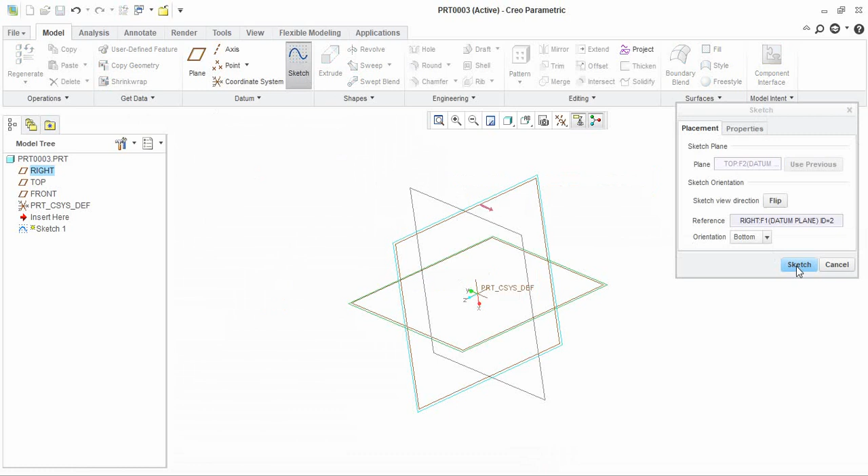So create a swept blend. At first you need a basic sketch, and based upon the sketch we will create the sweep blend. Here I am going to use a spline.

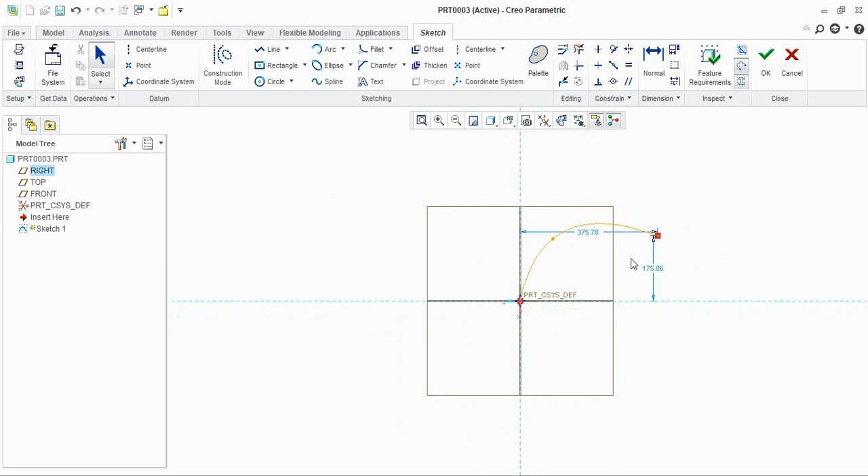Use your mouse center scroll button, double click to exit the sketch. We can use dimensions if needed, whatever dimensions you need. We will change it as 200. Here we will use 400.

So we have created a basic spline. If you need to add any additional sketch, you can add it in the sketch. I am going to use a line. We make a line and make it tangent to this spline. For that we will use constraints.

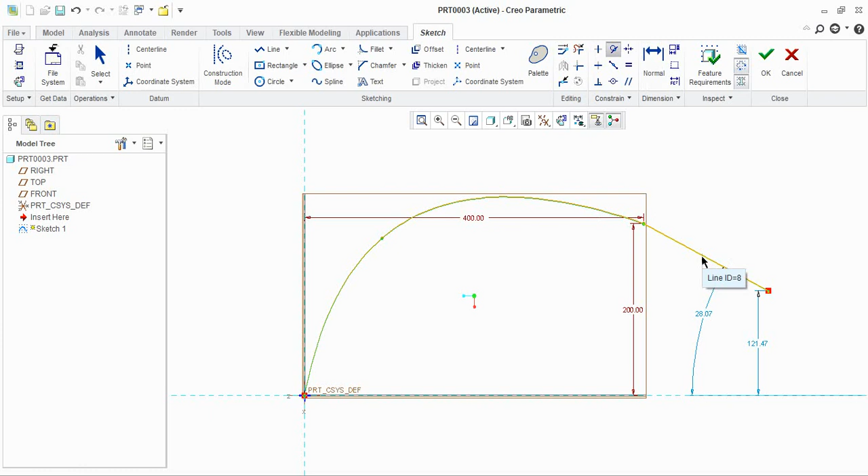Click on the tangent icon, select your spline, then use control and select the one more line. You can see here the tangent option is highlighted. So this will be our basic sketch.

So we will click on exit sketch now. Then you can see here we have the swept blend option. Select your sketch and then click swept blend.

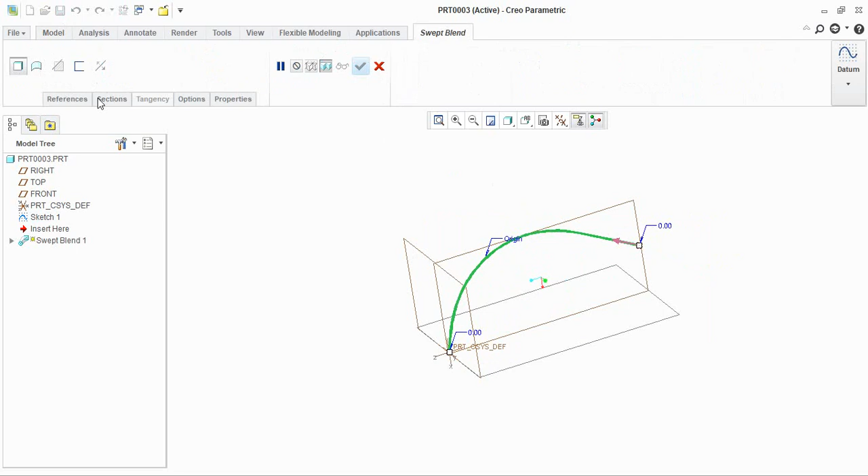Inside we have options called reference and section. In section we have two options, sketched section and selected section. We will go with sketched section. If you need to go with selected section, you need to previously create the sections.

How many sections you need in this plan, you need to create the section sketches and then use the selected sections. So now we will go with the sketched sections.

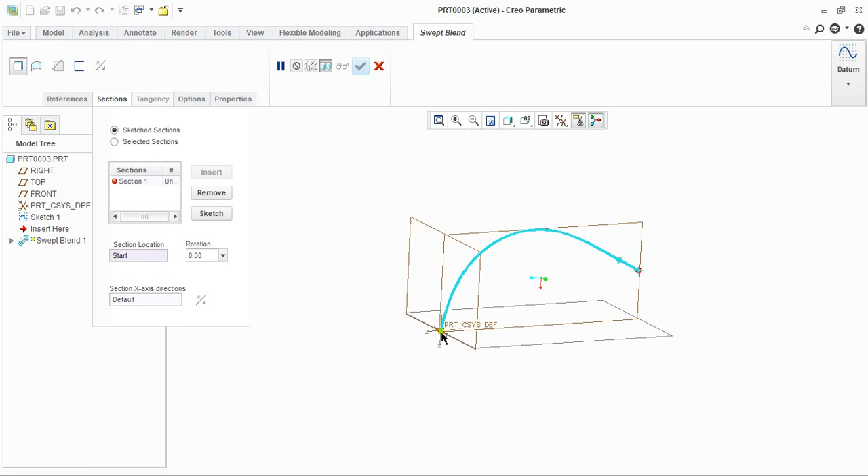So here you can see we have two sections over here, this is the start point, this is the end point. So at first you click here section 1 and go for the sketch option.

We will create a basic sketch using a rectangle. Draw a simple sketch rectangle and then click OK. So this will be our first section.

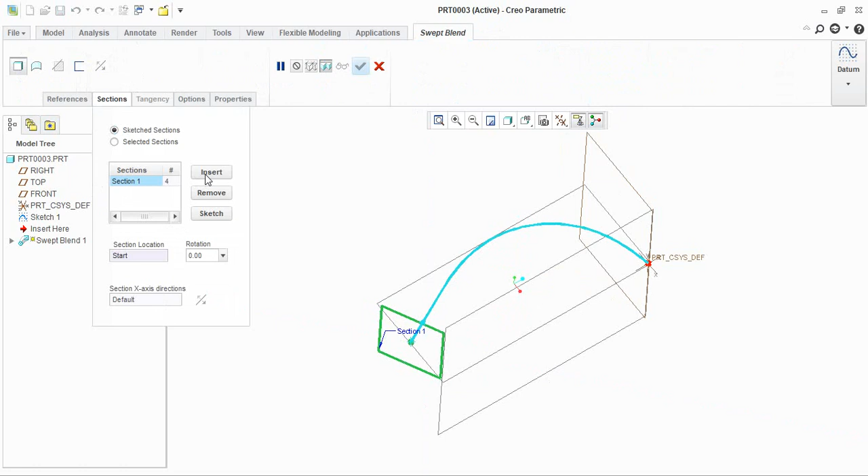So if you click here insert, a new section will be included here. You can see here the system automatically takes the next endpoint as the second section.

If you need to create any sections in between this spline, at that time you need to use the datum. You need to create a new datum here. We will click on datum and use the point option. Select the point and click on your spline wherever you need to create one more section. So we will go here and then give OK.

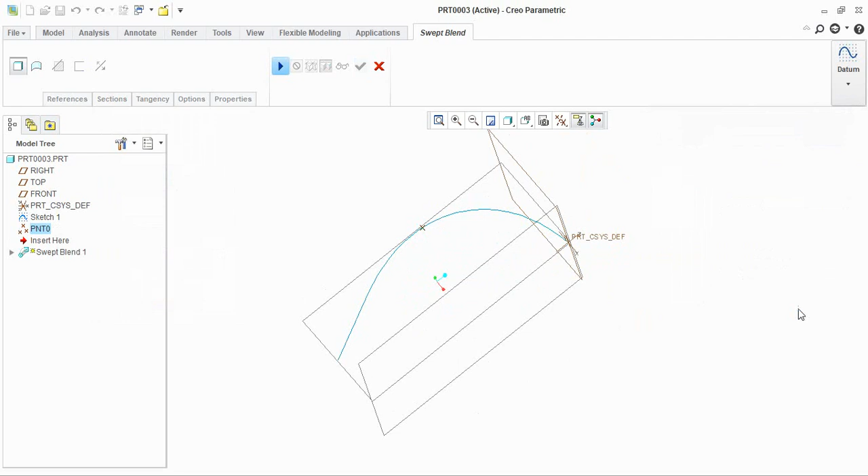So again resume your sweep blend. Now when we go for section, you can see here the additional point section has already been defaultly selected.

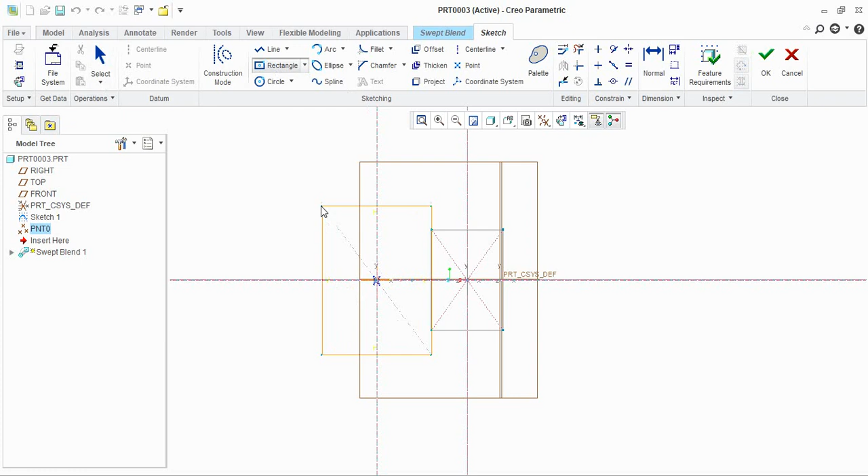So again we will go for sketch, creating our second sketch. Again we will take a rectangle. After creating the second section, again press OK.

So you can see here, joining both sections, a 3D model has been created.

You can see here a rectangle has 4 corners, so the second section should also contain 4 corners. Based upon the edges, your 3D image will be created.

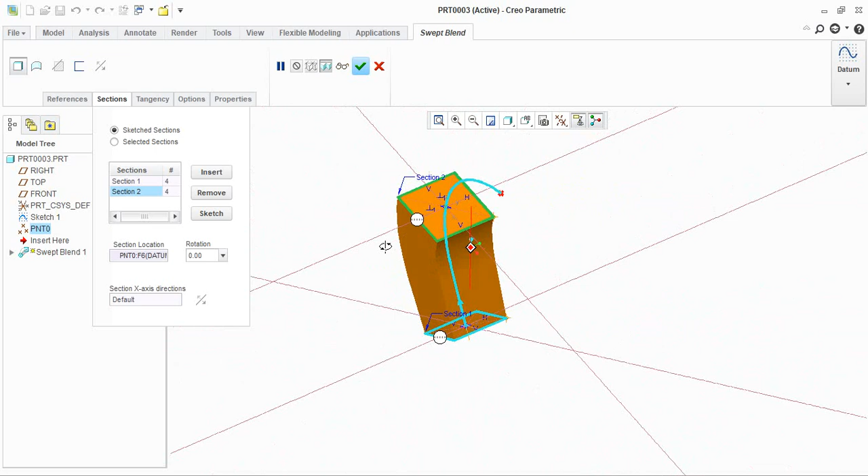So again we will insert one more section, section 3, which will be our endpoint corner. Again we will go for sketch and create a rectangle. Again click OK here, exit sketch.

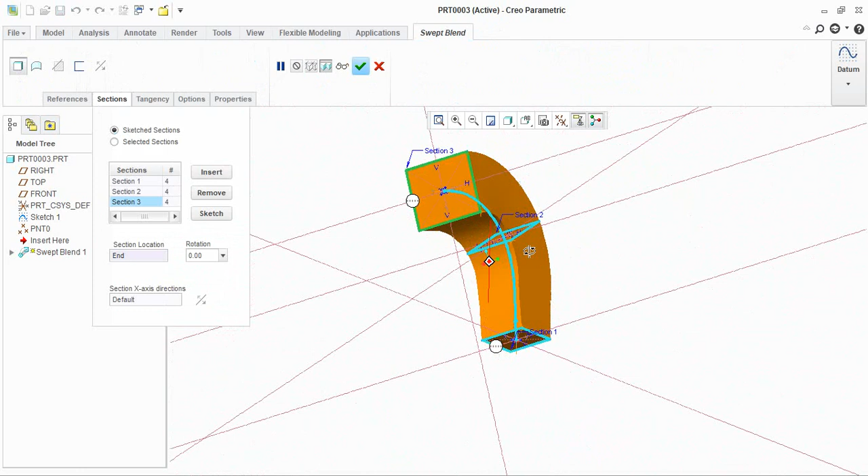So you can see here a 3D object has been created using the swept blend option. Here we have options where if you need a solid object you can use this option, and if you need a surface you can use this one. So your sketch model will be created as a surface model.

If you need to use any thickness option, you can go with the thickness option. Click on solid and then click on thickness, thin features. In thin features you can define whatever feature thickness you need. If you give 5, for example, your thin feature will be created at 5 mm.

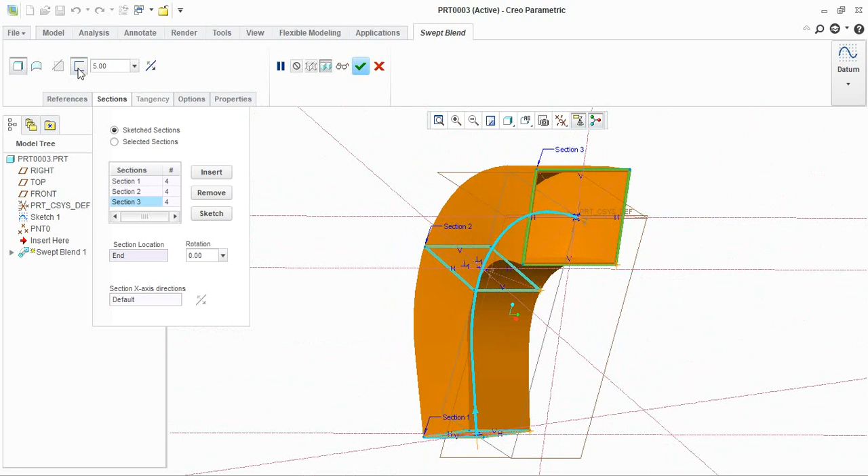We will go with solid here. For example, if you need to change the sketch, I mean change the section of any part, directly click on the section and then again go for sketch.

So here I will change my sketch now. We will delete the rectangle and create a circle here instead.

You need to consider one thing, how many corner edges are there in the previous section. In our previous section we created a rectangle, and section 2 contained 4 edges. So you need to divide your circle into 4.

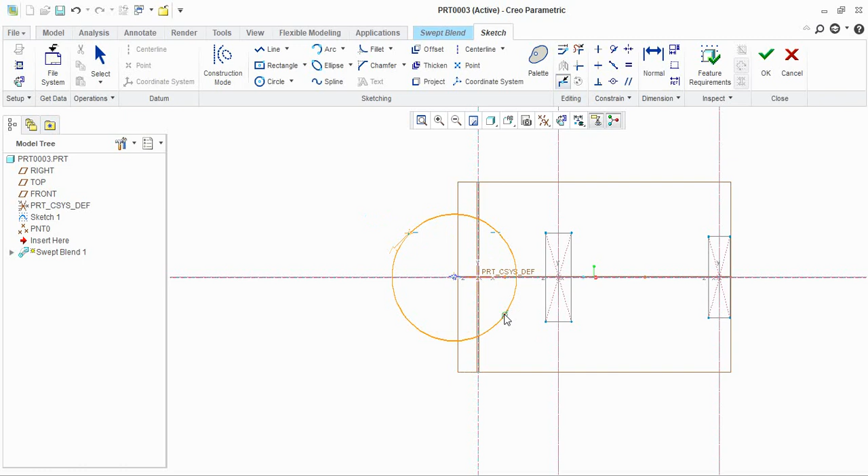For that we will use the divide option. Click on divide, and wherever you need to divide you can click here. So we have divided the circle into 4 parts.

So after changing your sketch, again go for OK, exit sketch. You can see here the 3D model has been created based upon the sections.

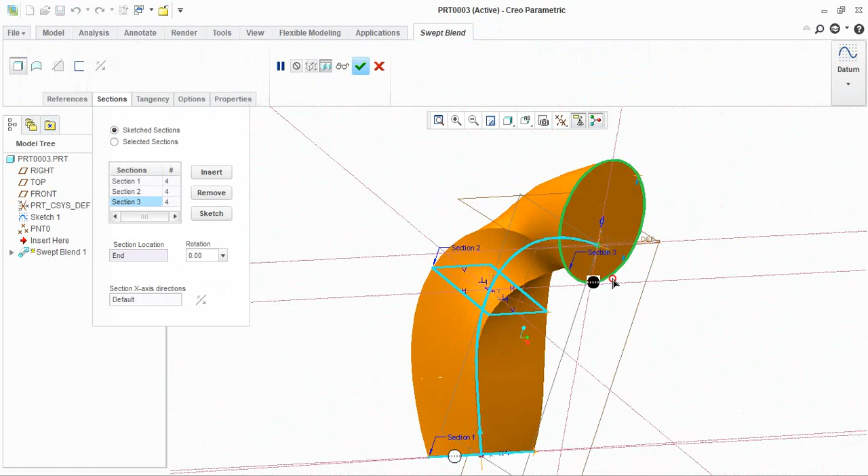If you need to change the start point of your section, then again you need to go for sketch. You can see here in this circle we have 4 points, so it takes this point as the start point. Now I am going to change the start point of my section.

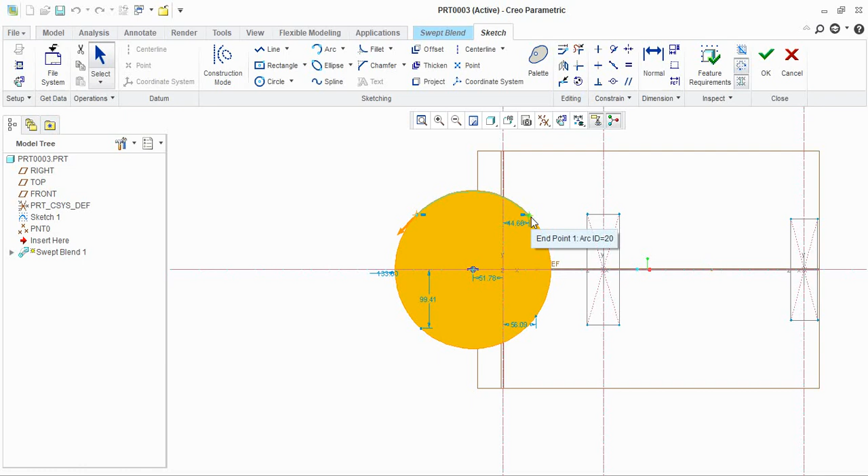So we will click on this point, right click your mouse, and make it the start point. Now this point will be our start point for our section. So again press OK.

Now you can see here the section has been changed. I mean, this particular corner point will be merging with this point. So this is how we need to create the swept blend option.

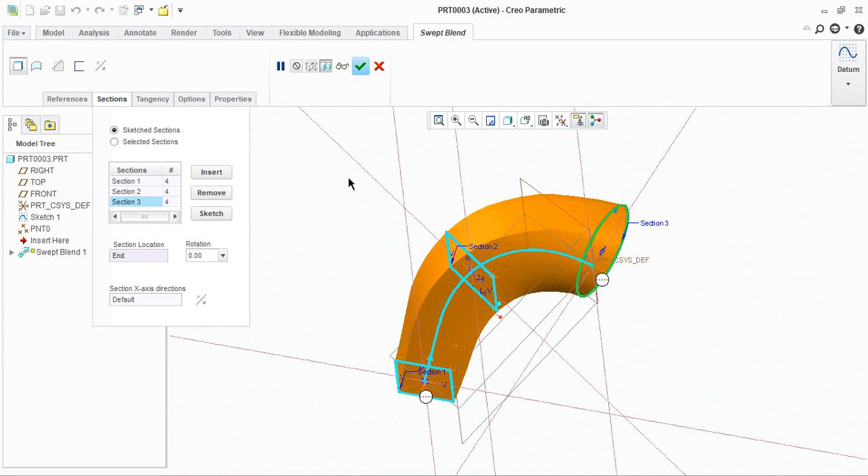So if you are using the surface option, you can see here if you are creating a surface, your both end faces will be open. If you need to close these faces you can use the cap end option here.

You can see the difference now. If you use the cap end option, both open edges will be closed.

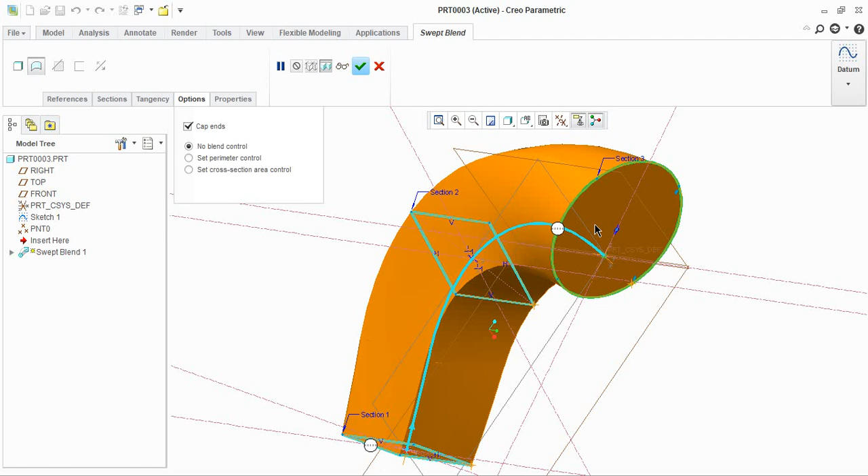So using swept blend you can create models like these. You can create a thin feature, a surface model, or even a solid object using this swept blend option.